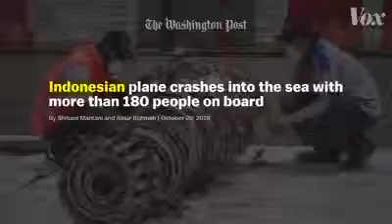This was just a few months after another flight, Lion Air 610, crashed in Indonesia and killed 189 people. These two flights were operating the same plane, the Boeing 737 MAX 8. And its engine is the key to understanding why this particular plane has caused so many problems.

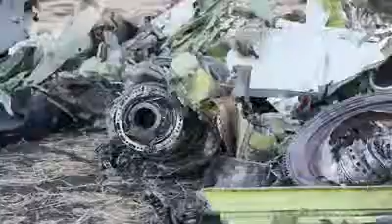But there's nothing actually wrong with this engine. In fact, airplane manufacturers raced to put them on their new planes. That's where the problem started.

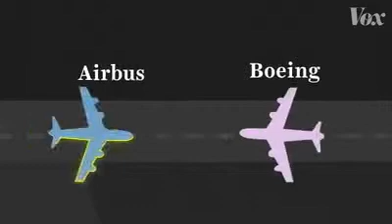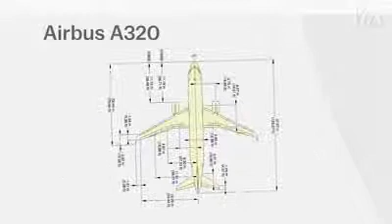The two biggest airplane manufacturers in the world are Airbus and Boeing, and they have a fierce rivalry. If one of them can offer a better plane, the other could lose a lot of money. That's exactly what was about to happen in 2010. Airbus announced that they would update their most popular model, the A320, a single-aisle airplane that services many domestic flights. You've probably been on one.

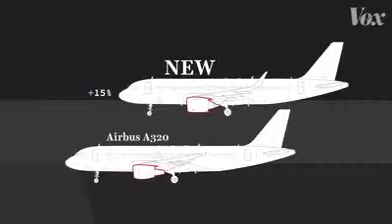For this new plane, Airbus had a big update. It would have a new kind of engine, much larger than the previous engine, but it would make the plane 15% more fuel efficient. And just as importantly, this upgrade wouldn't change the plane that much. A pilot could walk into the new model with little additional training and be on their way. It was called the A320neo, and it would save airlines a lot of money.

This was a problem for Boeing. To compete with Airbus, Boeing's obvious move was to upgrade the engine on their single-aisle plane, the 737. But there was one issue.

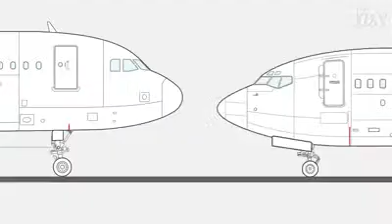Here's a sketch of the 737 next to the Airbus A320. Notice how the 737 is lower to the ground than the A320. This meant Airbus could slide a new engine under the wing of their A320, but there wasn't enough room under the wing of the Boeing 737.

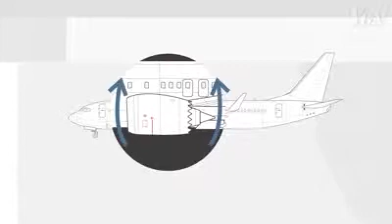But a few months later, Boeing's product development head had big news. He said, "We figured out a way to get a big enough engine under the wing." Their solution was to move up the engine on the wing so that it would be slightly higher, and it would fit on their 737s.

And just like Airbus with the A320, Boeing said that their new plane was so similar to its predecessor that pilots would only need minimal additional training. The 737 MAX became the hottest selling plane on the market, and it helped Boeing keep up with Airbus.

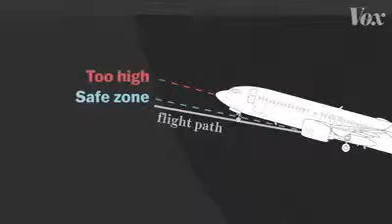Except moving the engine up on the 737 had a side effect. When the 737 MAX was in full thrust, like during takeoff, the nose tended to point too far upward, which could lead to a stall. This was a problem because these planes were supposed to behave exactly like the old ones.

So Boeing came up with a workaround. Instead of re-engineering the planes, they installed software that automatically pushed the nose downward if the pilot flew the plane at too high of an angle. They called it the Maneuvering Characteristics Augmentation System, or MCAS.

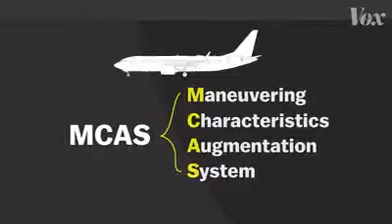But because Boeing was selling the 737 MAX as pretty much the same plane as the 737, they didn't highlight the new MCAS system. Many pilots only got a 2-hour iPad course before entering the cockpit for the first time, and the training material didn't mention the MCAS software. In 2018, several American pilots complained to the federal government that the 737 MAX was suddenly nosing down.

On October 29, 2018, Lion Air Flight 610 took off from Jakarta. In the flight report, which shows the plane's altitude over time, you can see that the plane was in full thrust during takeoff. But at a certain point, the nose of the plane kept lurching downward.

The pilots couldn't figure out why this was happening. The captain asked the first officer to check the quick reference handbook. They couldn't find the solution. The pilots continued to fight with the MCAS. The plane struggled to gain altitude.

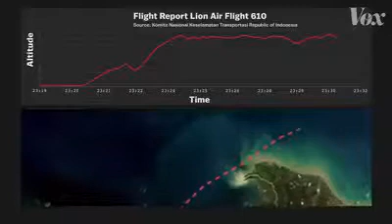Reports show it was likely because the computer was getting incorrect sensor data, pushing the plane toward the earth below. 12 minutes after takeoff, the plane crashed into the Java Sea.

In the Ethiopia crash, the report shows that the pilots were actually able to disable the MCAS, but it was too late to overcome the malfunctioning MCAS sensors.

For now, nearly every 737 MAX 8 in service has been grounded, and the Federal Aviation Administration is facing scrutiny over how they rushed this plane through certification.

Boeing's response has been to apply a software update that makes the MCAS less aggressive, while also saying they'll increase pilot training on how to turn it off.

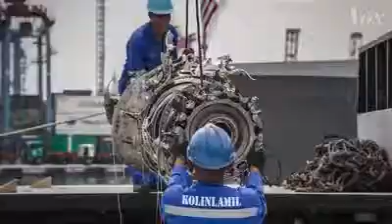This problem started with the company's race to compete with its rival. It pushed them to pretend like their new plane behaved exactly like their old one, even when it didn't.